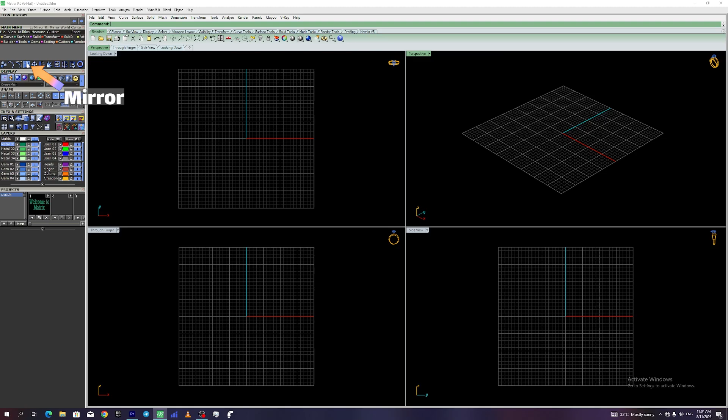The next command we are going to learn, which works hand in hand with control points, is mirror. Mirror allows you to create a reflected copy of your object. And here's why this is so important. Most jewelry pieces you see, especially rings, pendants, and earrings, are symmetrical. This means you can design just half of the piece and then use mirror to create the other half perfectly and instantly. Let me show you how it works with an example.

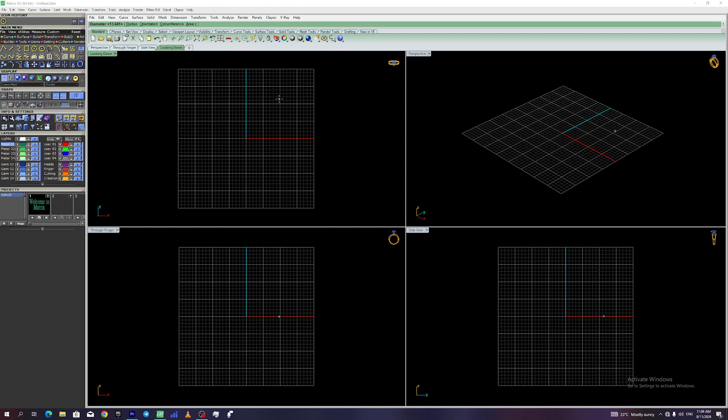Let's say we have three shapes on the screen: a circle, square, and triangle. First, we select them all, then we click on the mirror command. Now, look at the command bar. Rhino is asking us to define the start point of the mirror axis. We can use F4 to set the center point as the start, just like we learned in previous sessions.

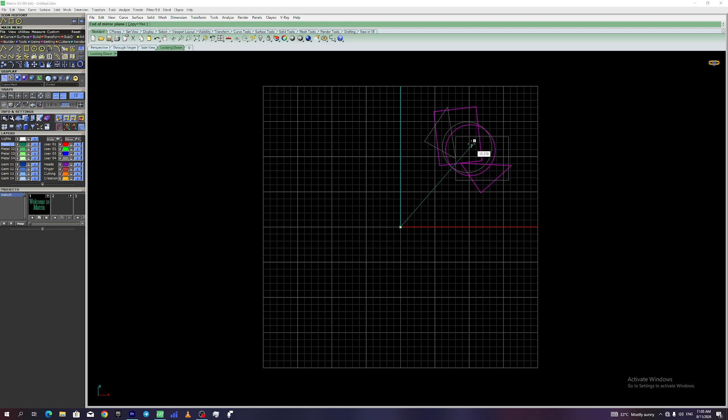Once the start point is set, we can hold down the Shift key to lock the mirror axis in a perfectly straight line. This ensures our copy is perfectly aligned. With Shift held, we can mirror the objects downward or in any direction we choose.

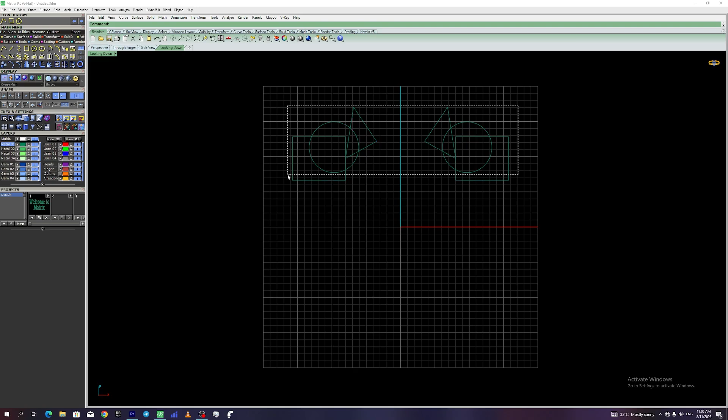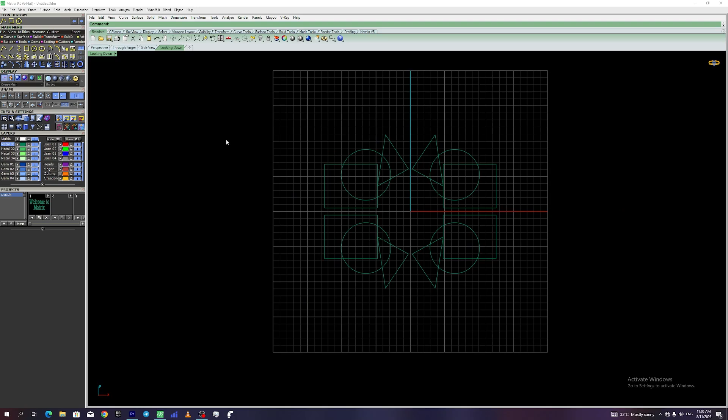Now, here's something interesting. If we move the original object, the mirrored copy will move with it automatically. This is called history in Rhino. It means the two objects are linked, and any change you make to the original will affect the copy as well. I'll explain this in more detail in a future session because it's a very powerful feature.

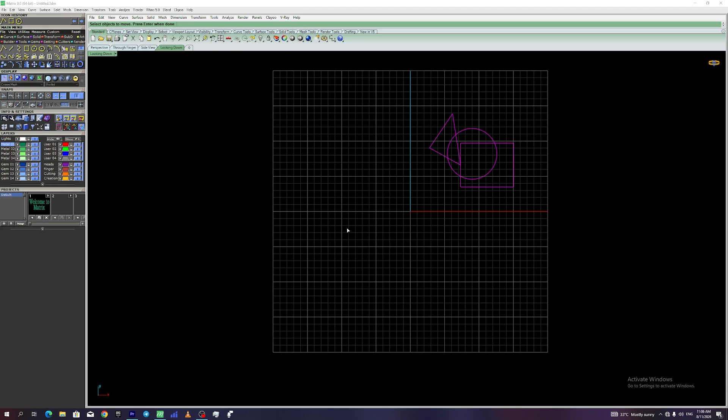The next command in 11 commands, located right next to mirror, is move. Move does exactly what it sounds like. It allows you to reposition your object by a specific distance. Let's say we have a square drawn at the center, and we want to move it exactly 10 millimeters to the right. First, we select the object, then we click on the move command. The command bar asks us to define the start point of the movement. We can set the center point using F4.

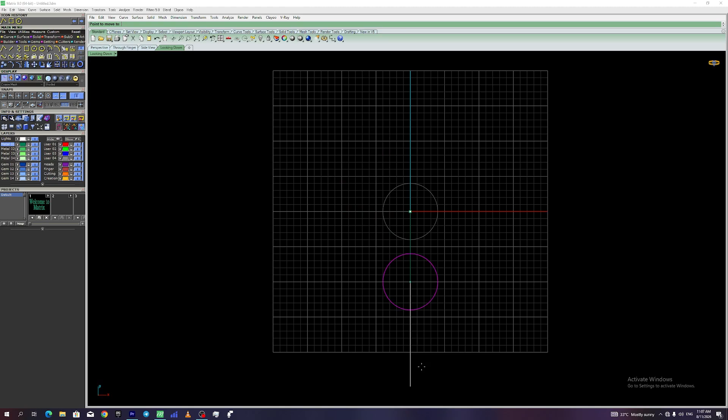After that, we type 10 in the command bar. And now, wherever we click, Rhino will place the object exactly 10 millimeters away from its original position. And if we hold down Shift, we can lock the movement along a perfectly straight line, just like the ortho mode we learned about earlier. This is incredibly useful when you need to position objects with millimeter precision.

The next command we are going to learn is rotate. Rotate allows you to turn one or multiple objects around a specific point called the pivot point. To use rotate, simply select your objects, then click on the rotate command. The command bar will ask you to define the center of rotation. You can set this point wherever you want, for example, the center of the object or any other reference point.

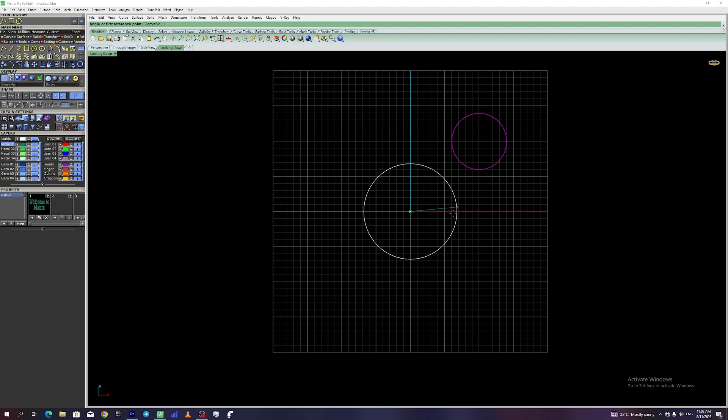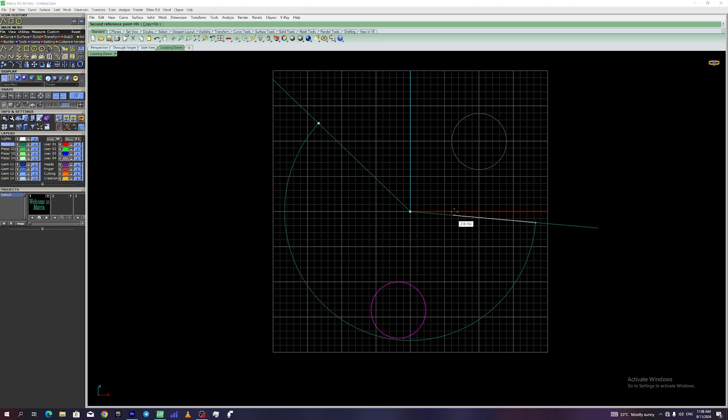Once the center is set, you can rotate the object freely by dragging your mouse. If you hold down Shift, you can lock the rotation in precise steps, making it much easier to control. You can also type a specific angle if you need exact rotation, for example, 45 degrees. This is especially useful when you're working on designs that require precise angular placements, like gemstone settings or repeating patterns.

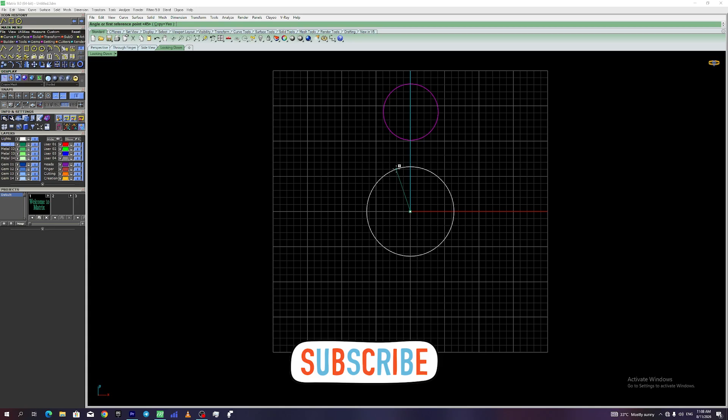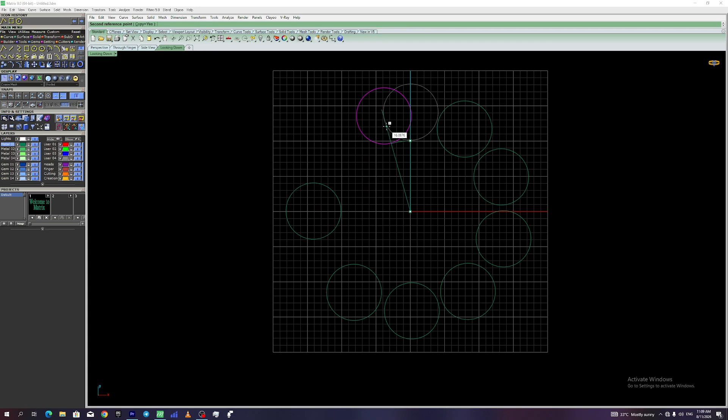And here's another great feature: if you activate the copy option in the command bar, you can rotate and copy at the same time. This means you can keep the original object in place and create a rotated copy wherever you want, or even at a specific angle. This is perfect for creating circular patterns, like placing gemstones around a ring band or creating a decorative halo around a centerpiece.

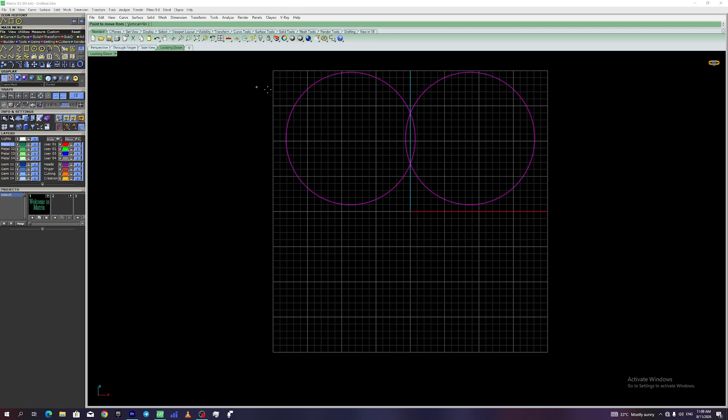So, to recap what we covered today: the mirror command that creates a perfectly symmetrical copy of your object, the move command that repositions your object by a specific distance, the rotate command that turns your object around the pivot point with or without copying, and history, the link between original and mirrored objects. The Shift key helps lock movements and rotations in straight lines, and the copy option allows you to rotate and duplicate objects simultaneously.

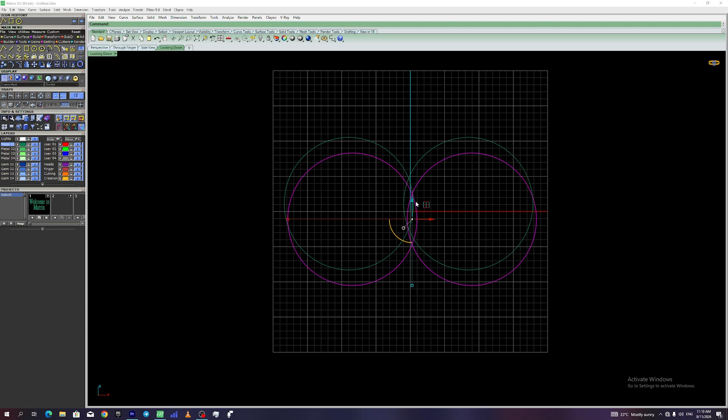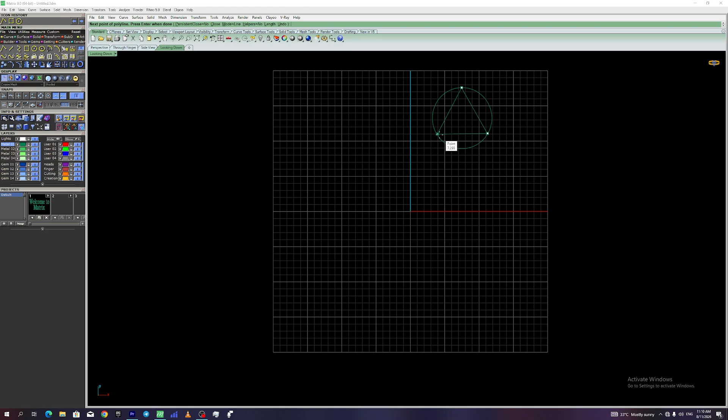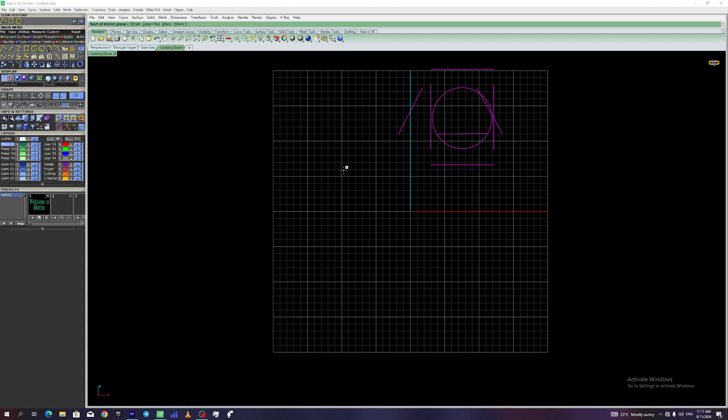And that wraps up today's session. Today we covered three of the most practical and powerful tools in Rhino and Matrix: mirror, move, and rotate. Whether you're creating symmetrical rings, positioning gems, or arranging patterns, these tools will be your go-to commands. In the next video, I'll introduce explode, split, join, and trim, some of the most important commands you'll ever use.